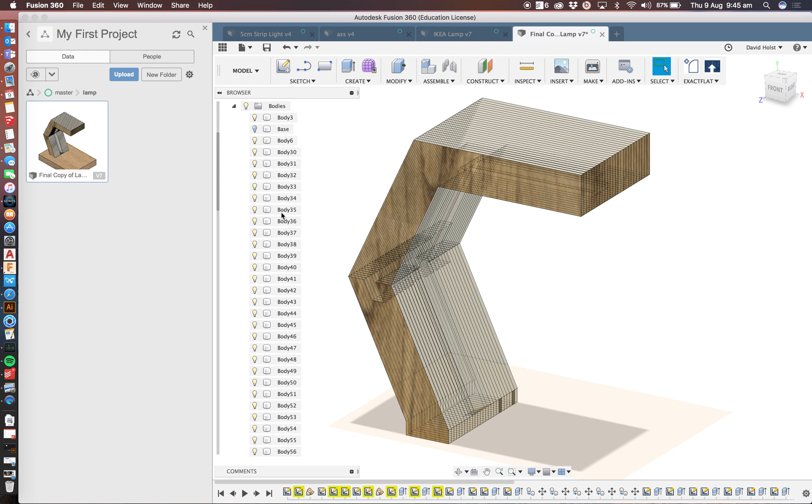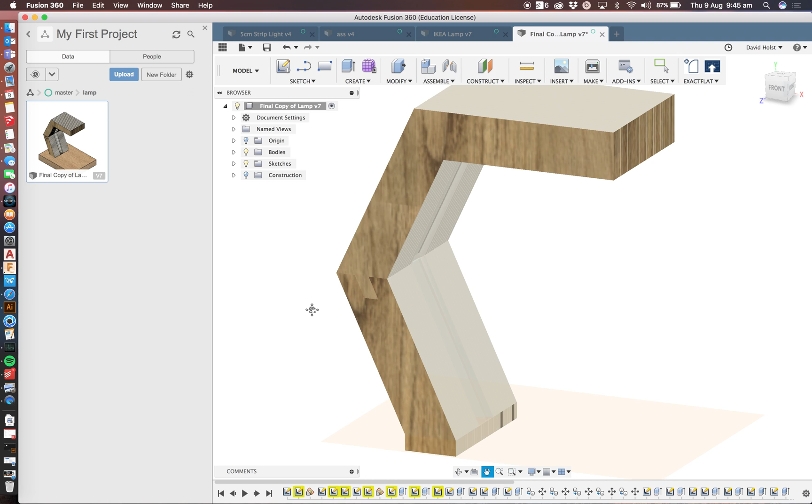You can see here that Mitch has got a little finger joint that alternates on each layer. So without taking into consideration this middle section where the LED sits, we're going to have 4 major parts to the arm of this lamp.

I'm going to show you how we can extract those and put them into Illustrator and get them ready to laser cut. The first thing we need to do is create a sketch up here and click on the face that has the information we need, which is this one here for me.

I'm going to hit P to project the geometry, and click on this shape. That brings all of the lines and sketch information from that previous face through, because that's the path I need to cut with my laser cutter. I'm going to hit OK.

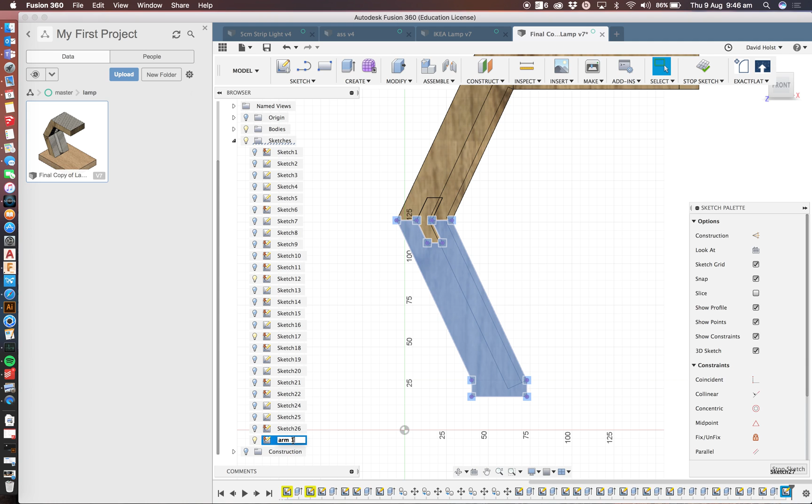I'm going to go over to Sketches, and I'm going to call this one Arm, because it's the arm of the lamp, 1 for layer 1, and it's the first part of that, so I'm going to go 1.1. So this is Arm, layer 1, part 1.

I'm then going to stop sketch, and create a sketch. I'm going to click on this top part, hit P to project my geometry, and hover over the top part. Click that, it brings the line work through. Hit OK.

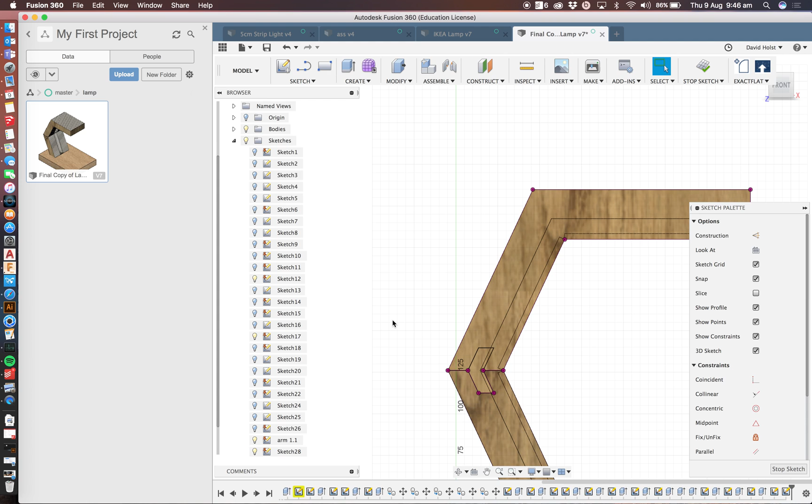Go down to my sketch name, and I'm going to call that one Arm 1.2, because that's the second part of layer 1. Now remember, you've got lots of multiple repeating parts in this, so you don't need to do this for each part.

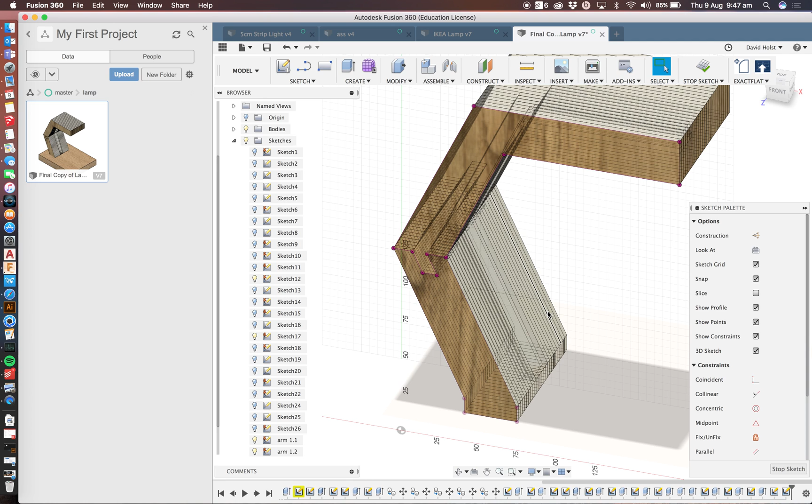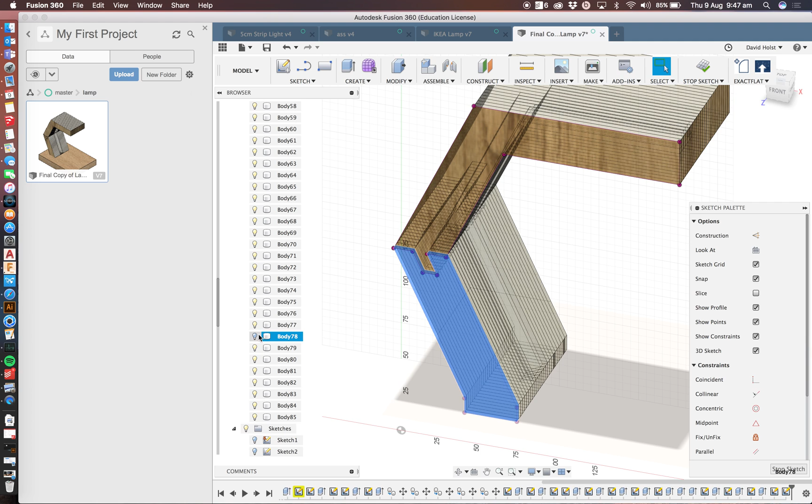This is why it pays to put your stuff into groups if you can. I could turn him off. I'll try and find that top one now, which is body 78. I'll turn him off.

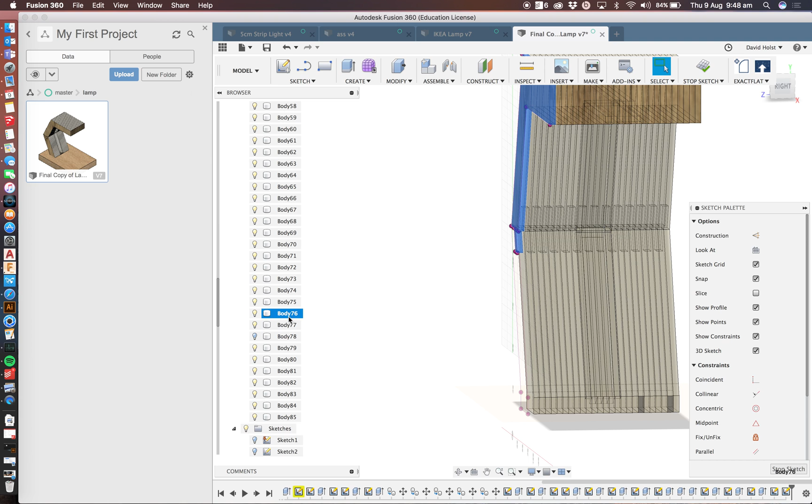And now I should be on the next layer. Hopefully. No, I turned the wrong one off. Need to grab that one. Try and find it, there it is, 76. I'll turn him off, okay.

These sketches are in the way of the ones I drew before, you can see by those pink lines. So if I want to get rid of those, I can scroll down back onto my sketches section and turn them off. Then I could do the same thing.

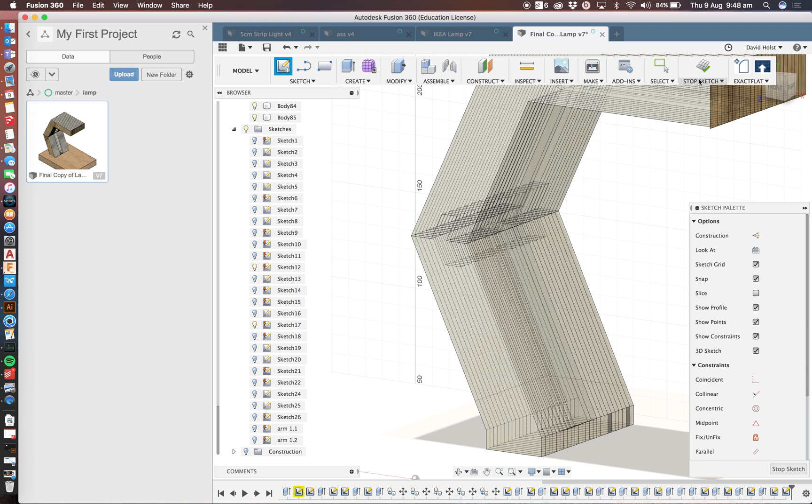So I'm going to go create sketch. I've turned that first layer off, so I'm on the second layer now. I'm going to stop sketch from that last one, turn Arm 1.2 off, create a sketch, jump onto here.

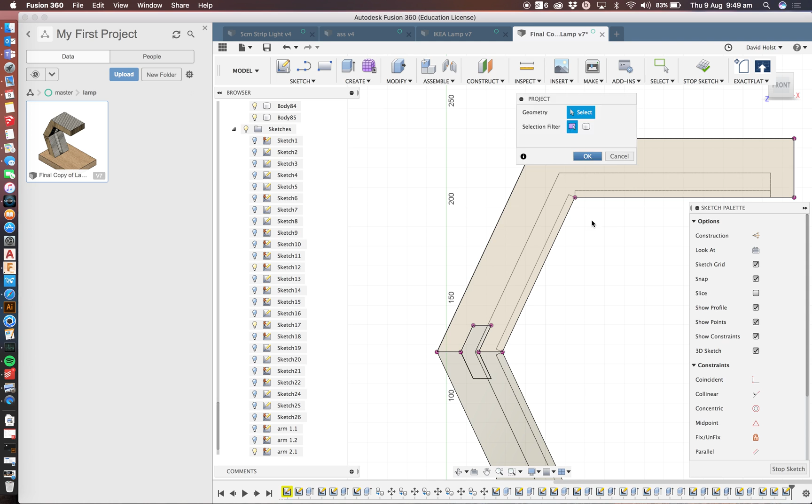I'm going to rename that to Arm 2.1. Project that through to make sure I've got it. OK, stop the sketch.

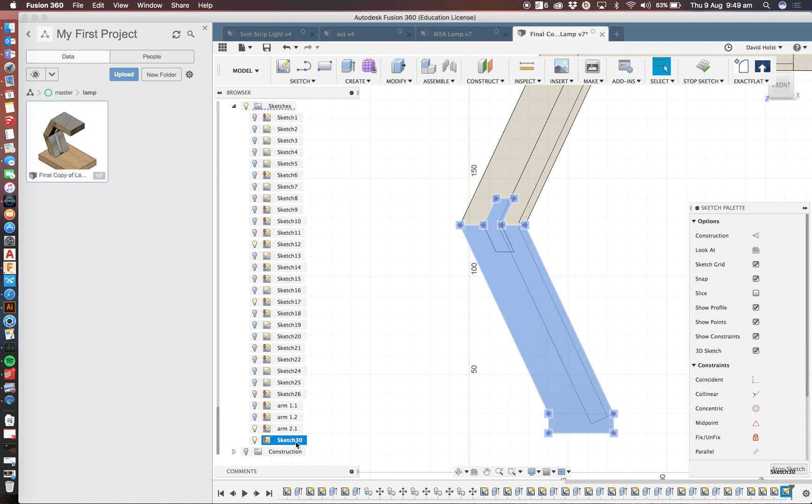New sketch, bottom one. Then I'm going to project it through, P for project, grab that one, OK, scroll down, and that is now Arm 2.2.

So I've got my 4 major parts that make up most of this arm here. Now what I need to do is export those to DXF. I'm going to go File, right click on ARM 1.1, save as DXF. On my desktop, I'm going to create a new folder called Mitch ARM Parts.

I'm going to call this ARM 1.1 and save it as a DXF format. Right click on ARM 1.2, save as DXF, call it ARM 1.2, save. Then ARM 2.1, right click, save as DXF. ARM 2.2, right click, save as DXF, and save.

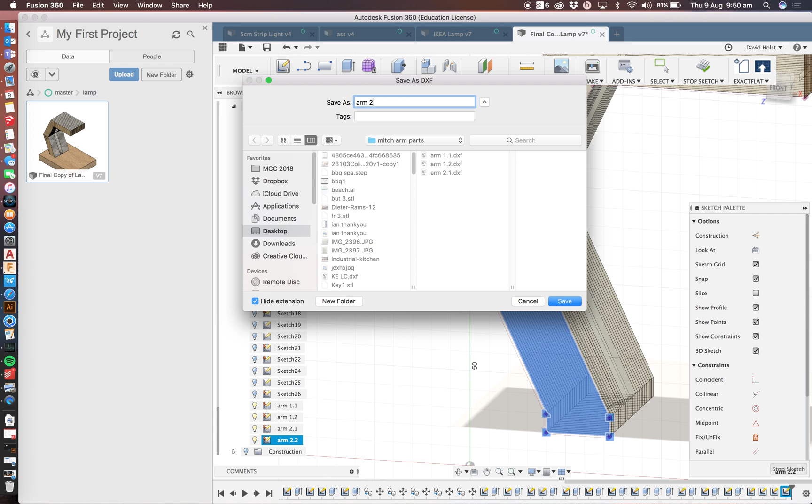So I've got all my 4 major parts now as DXF files. Now what I need to do is bring all those DXF files together so I can cut out multiple parts. To be honest, the first time you do this, you might just cut out maybe 1 copy of each part to check that you've got them correct, but I can show you how to do both of those.

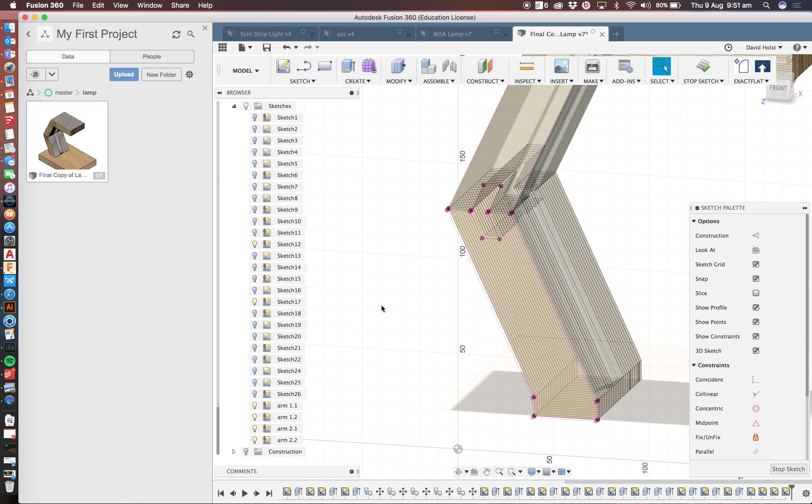So where we're going to actually put all those parts together is in a program called Adobe Illustrator. I'm going to open that up over here. So I've got Adobe Illustrator open. I'm going to click Create New, or you can go File New.

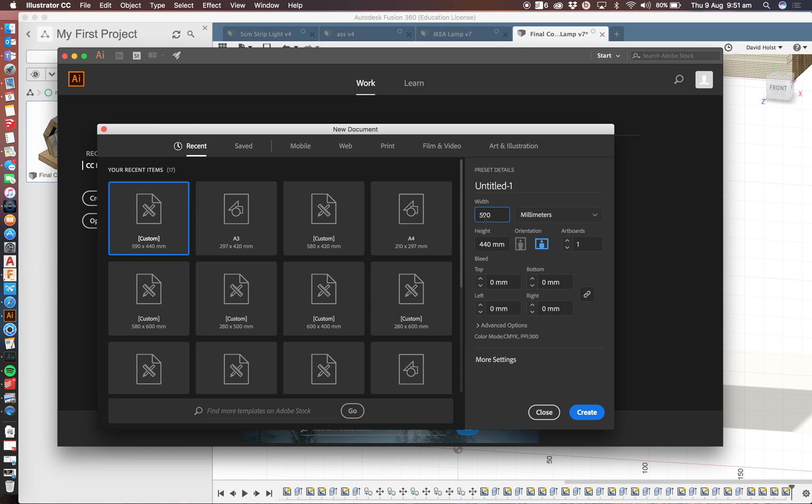Now this one's going to pop up, so we're going to go Custom. Make sure we're over here in millimeters. The width, I've already got it here because it was the last one I used - we want to make sure we're 590, and our height is 440. That's the size of pieces of plywood that have been cut up for us to use. And we're going to hit Create.

Okay, and that's our blank piece of plywood. Now we can get pretty close to the edges because I've allowed for the margins in this one. So we go File, and we're going to go Place.

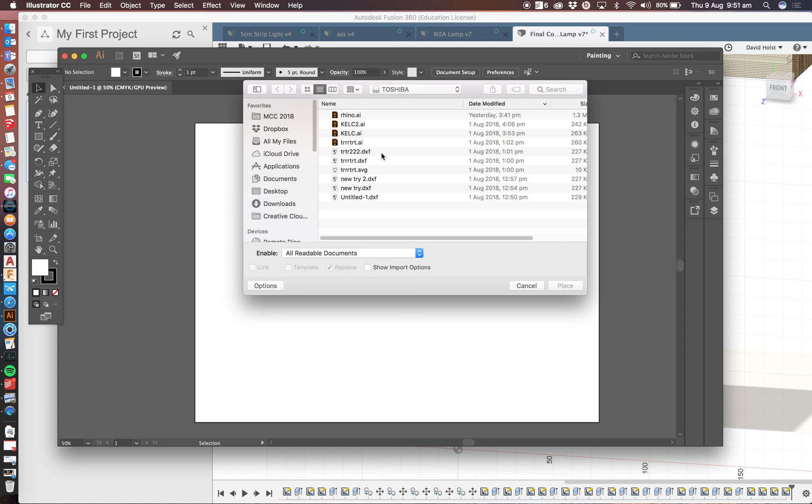And the first thing we're going to do is find our file. So I'm going to go onto my desktop, go into Mitch ARM Parts, and I'm going to go ARM 1.1, and I'm going to hit Place.

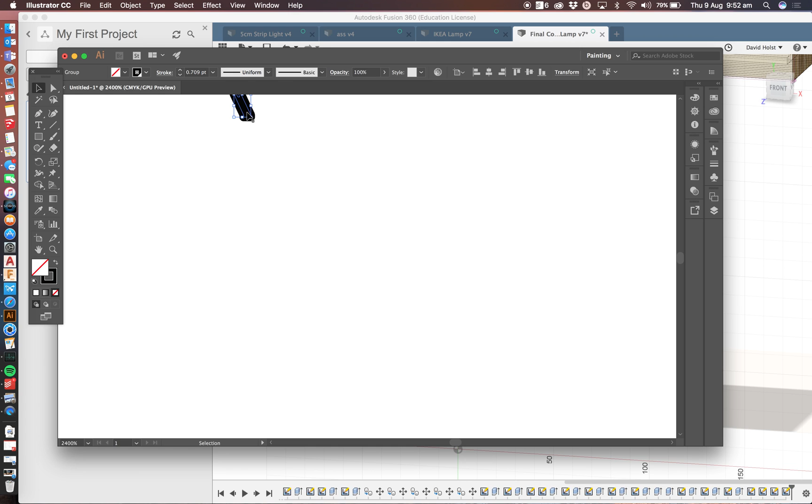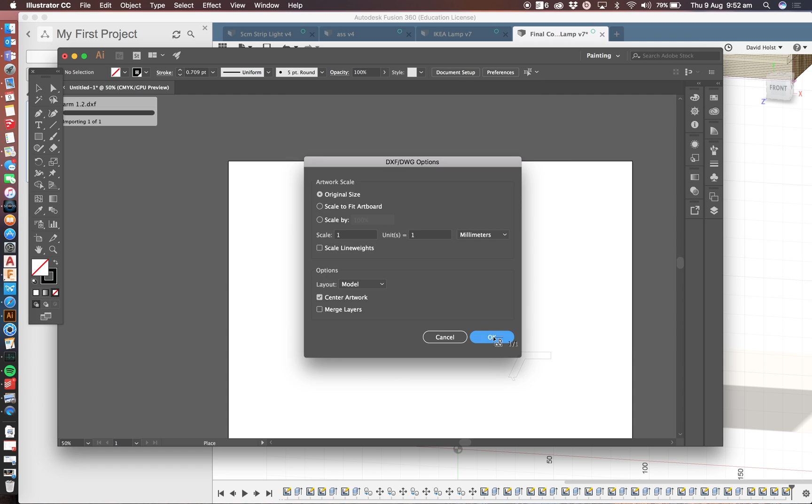That hasn't worked, so I'm just going to try again. File, Place, let's try ARM 1.2. Show import options, hit Place, original size, OK. There we go. File, Place, ARM 1.1, make sure Show import options is clicked. Hit Place, original size is what we're after. Hit OK, drop it in. There we go, so that's 1.1.

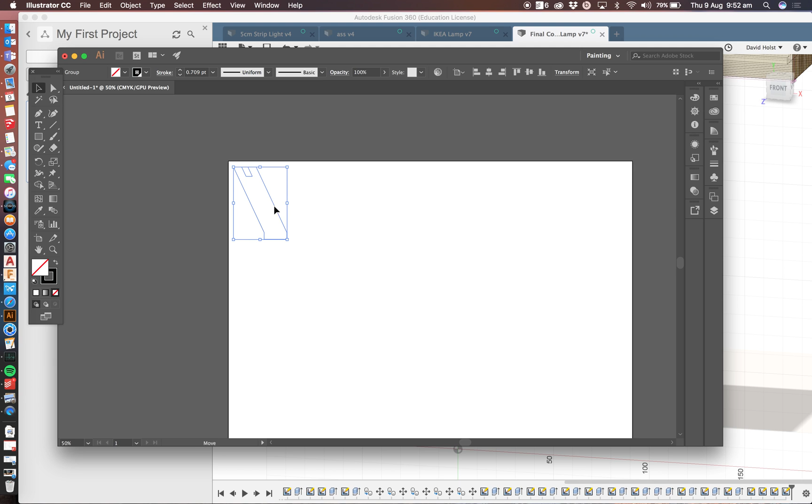File, Place, 1.2, Place, original size, OK. So that's the other part of it. I'll lay these out so you can kind of see - so that's those parts of it.

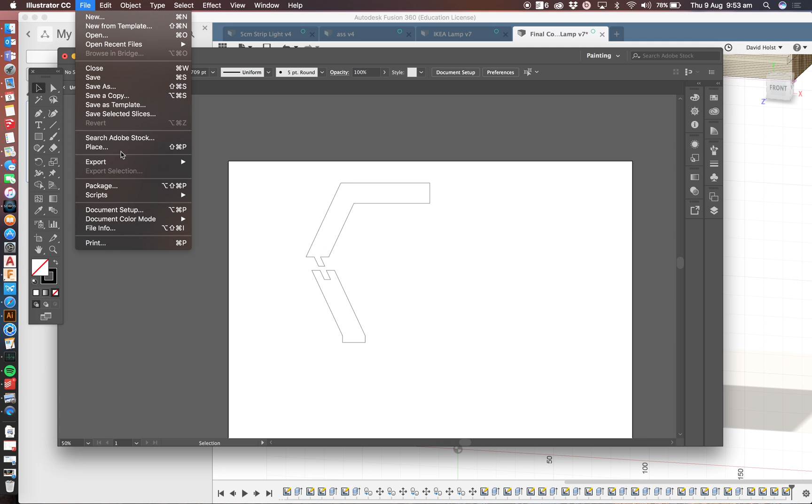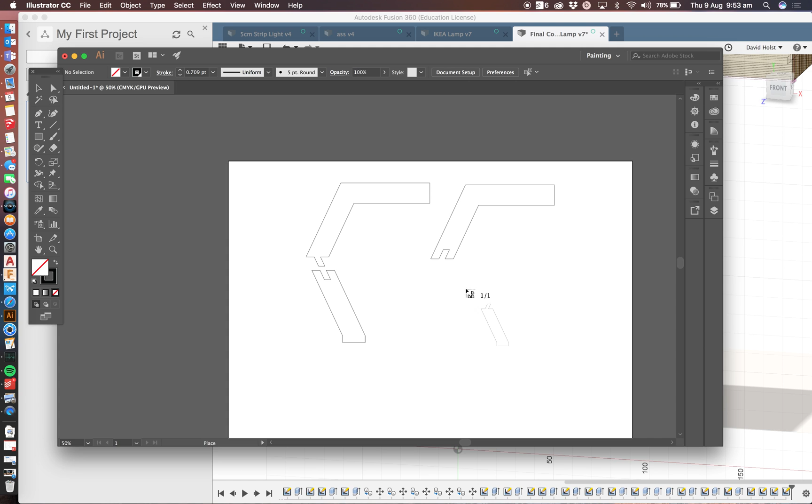File, Place, 2.1, original size, OK. And this is the other layer. File, Place, 2.1 - oh no, I need 2.2. File, Place, 2.2. Okay, like so. And there are our alternating layers.

Now, if I wanted to just do a test cut, the important thing is not to lay it out like this because it wastes a lot of plywood. Now, I'm just going to assume that Mitch has got this right.

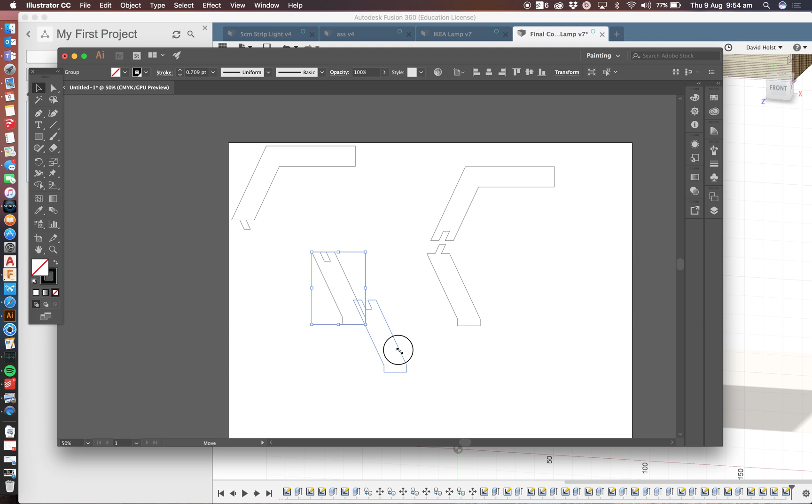And let's say that I want to do half the lamp, okay? So if I jump back into Fusion, I think I've got 10 parts - 1, 2, 3, 4, 5, 6, 7, 8, 9 - so we've got 9 on each side. So I'm going to do 5 of each to get us started.

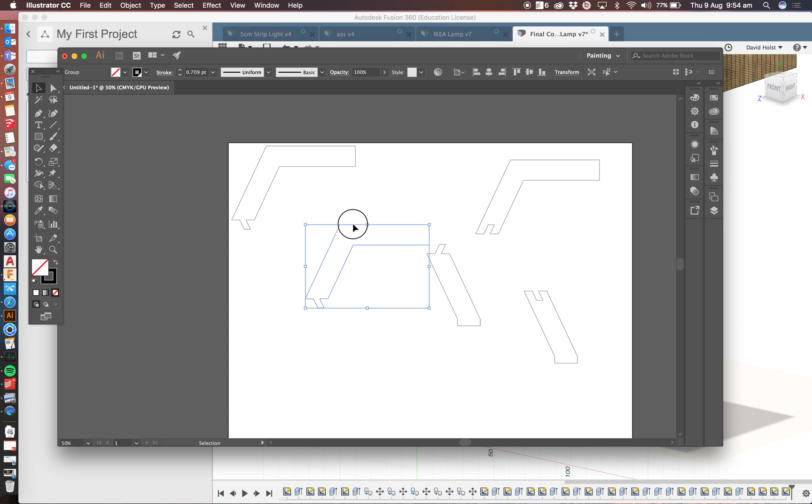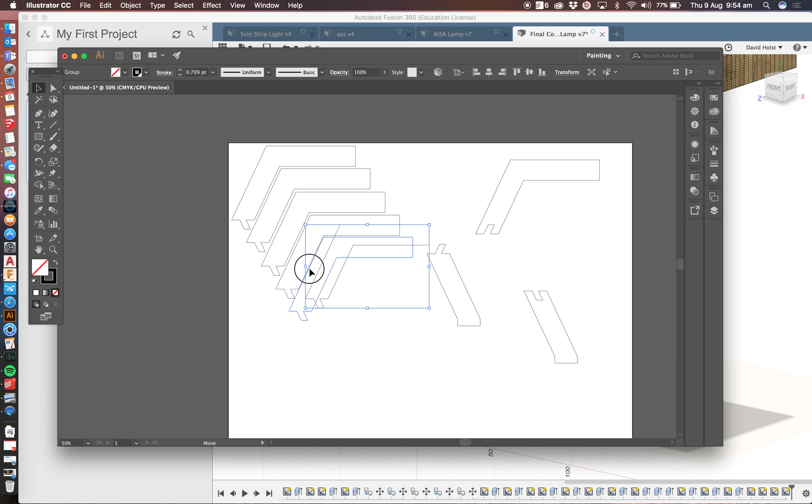Okay, so what we want to do now is nest it. This part here, I want 5 of those, so I'm going to go Command C, Command V, and try to get things as close as possible, leaving about a 4mm gap. Control C, Control V. Control C, Control V, and then let's go Control V again. So I'm nesting them together, trying to make the best use of the space.

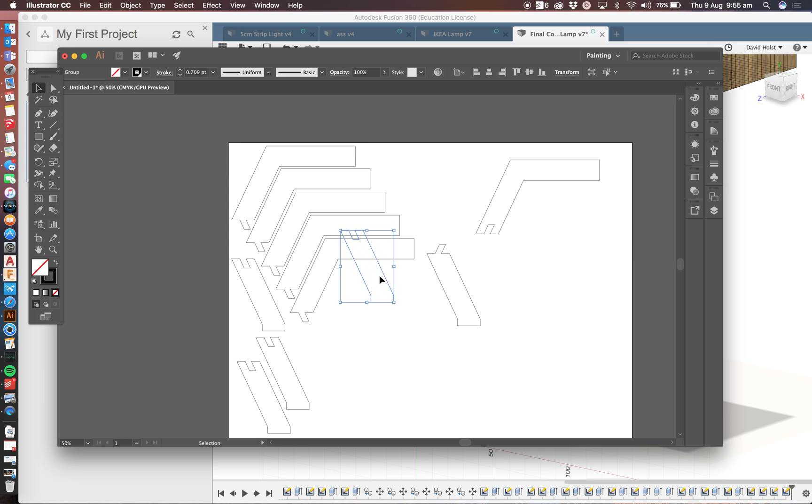Now I need 5 of these ones here, so I'm going to drop him over here. Control C, Control V - it's just like putting a big jigsaw puzzle together. Control C, Control V. Control C, Control V - I don't need to copy it each time, it's just bad habit, I think. Control V.

And then I've put those in there. Now I also need 5 of these, so I'm going to go Control C, Control V. Drop that one in there. Move this one to here. Control V. You can start rotating them if you like.

Go to the corner. I'm going to rotate that one to fit it in there. I'm just trying to use up as much space as possible to get the best value out of our plywood. Control V.

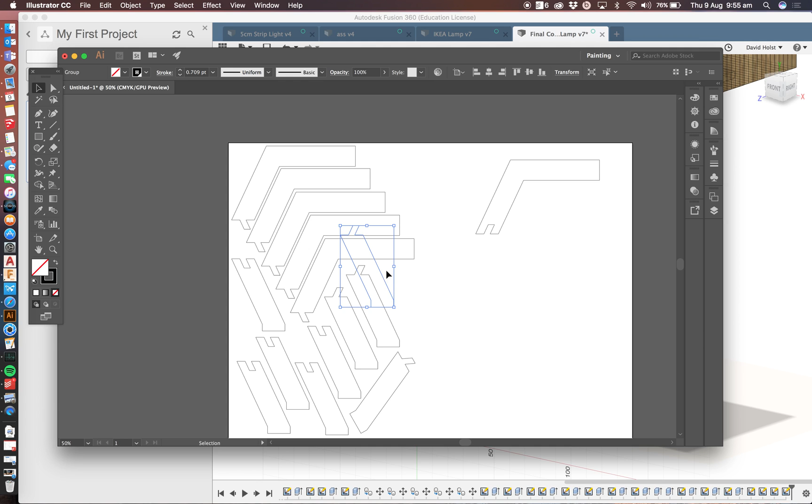Drop another one there, and then Control V. Put that one out over here somewhere. Now I need to get this one in. I'm going to rotate that around like that. Drop that one there. Control C, Control V. Just rotate things around and get a bit creative to make them fit.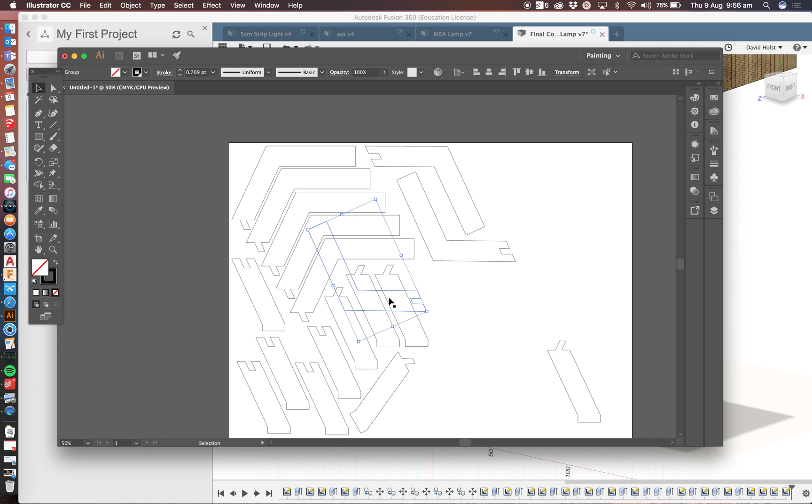That one in there. Control C, Control V. Grab that one there. 1, 2, 3, 4. Pull that to the side. Control C, Control V. Grab him, put him down here. Get that one flattish. If you hold shift, it'll snap to the 90 degree.

Make sure you got no lines overlapping so you don't cut any of your pieces. Grab him, rotate him around a bit, get him into there. And you can see that I'm starting to really efficiently use up my space.

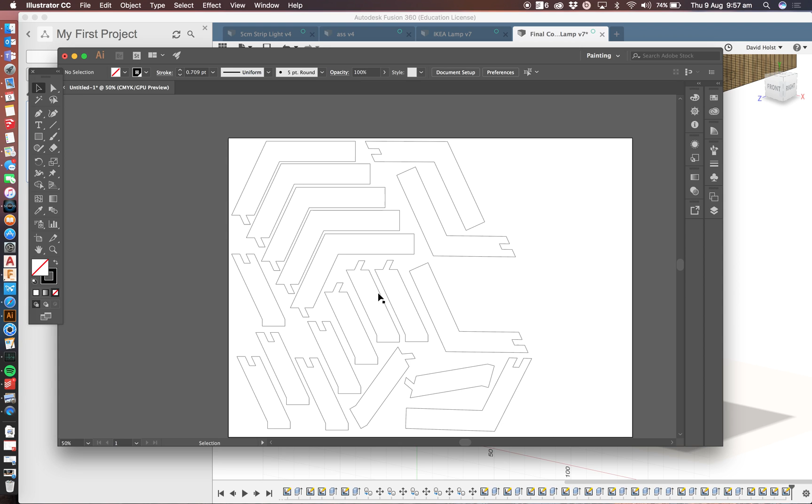Now, I might decide that, hey, I've got all this space and a sheet of plywood, and I'm going to be really efficient, so I'm going to cut out some more pieces because I know I need them on the other side of the lamp. So let's just say it's this bit here. It makes sense to fill a piece of plywood up because it's just more efficient for everyone else in the class.

And I'm going to use these on the other side anyway, so that's cool. So I might have 5 of those. Might grab this guy down here. Control C, Control V.

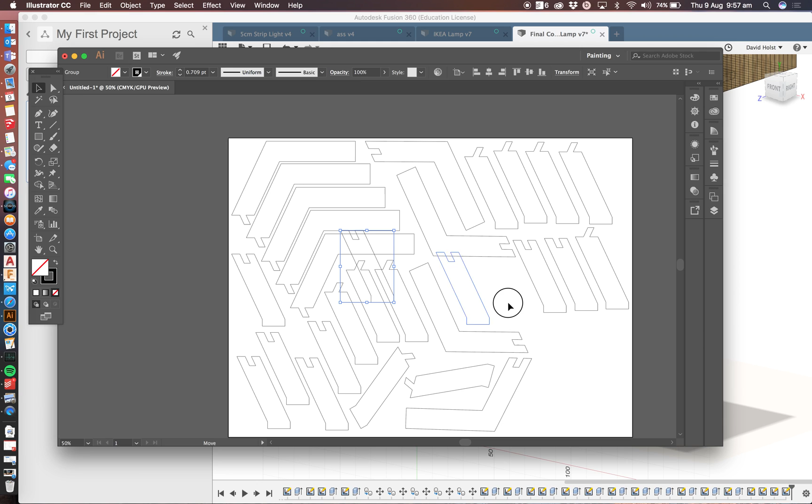Squeeze him in there. Whoop, undo. Make sure we've got the right bit. Squeeze him into there. Might be able to get another one of these in.

Try not to just fill it up, make sure you're actually cutting parts that you need. Because it's all about, when we're doing this CAM manufacturing, it's all about getting as efficient as possible. And might grab another one of these.

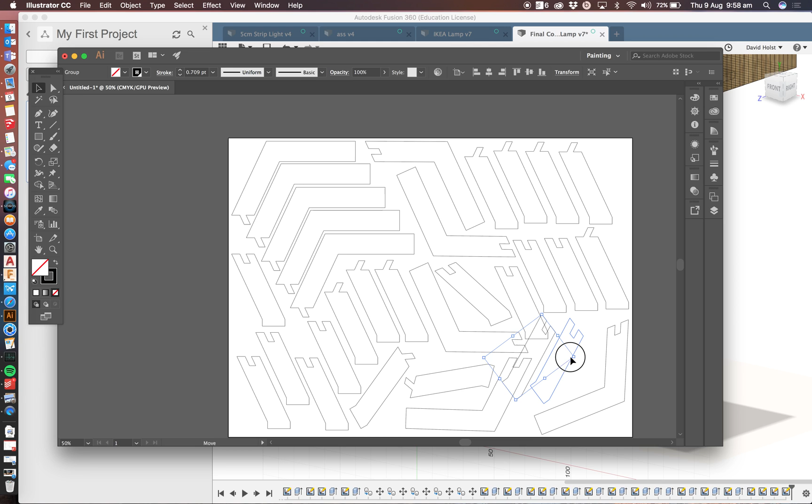Drop it in here. So as you can see, I've tried to fill up as much of the plywood as possible and cut out as many pieces as possible. And it would make sense to either jump into Excel, make a spreadsheet, work out how many parts you actually need and how many you've cut so that you can remain efficient.

But that's looking like a pretty good board to send to the laser cutter. Try and save about 5mm within the edges so that you don't lose any parts, but that's now ready to send to the laser cutter.

So for us to send to the laser cutter, the first thing I'd do is go File, Save As, and save it in Mitch Arm Parts, just as an Adobe Illustrator file. So I'm going to call this Arm Parts Sheet 1, so we can open it back up later and modify it or recut it or do whatever we've got to do. Version Illustrator CC, that's all good. That's a nice editable version for later on.

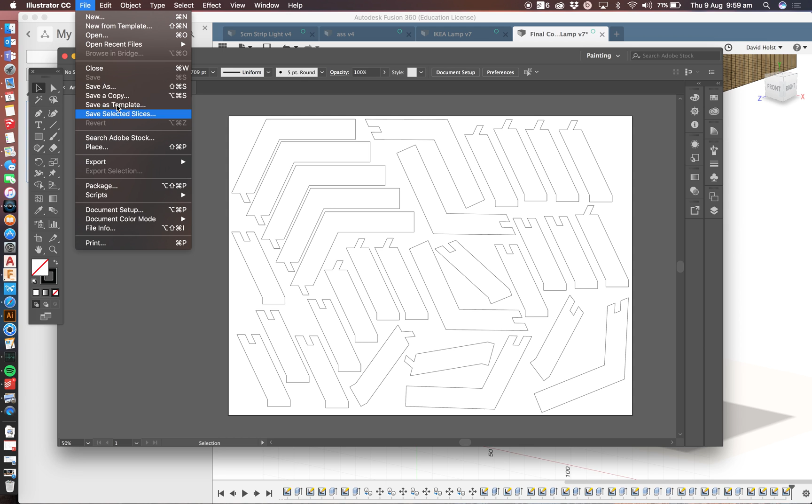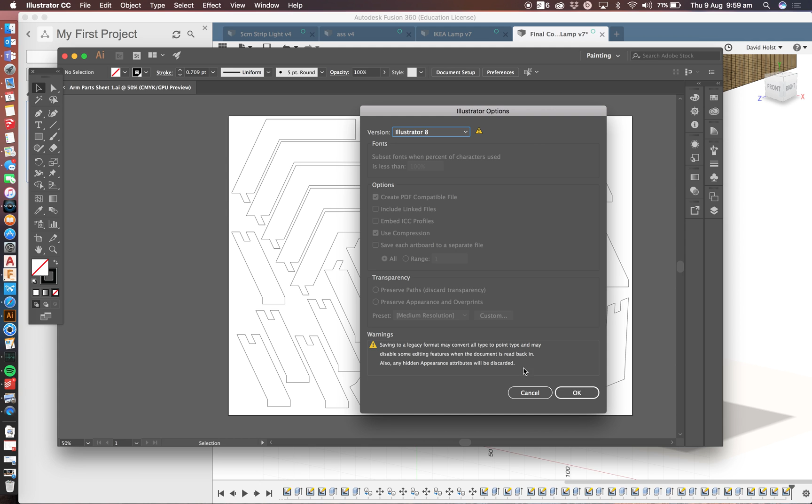And then if we go File, Save As, we're going to jump onto a USB drive, my Toshiba here. Make sure you put your name on it because it's going to get very confusing. So I'm going to call this Mitch sheet 1. We're going to save it as Adobe Illustrator, hit save, and the only thing we want to change here is our version. I want to bring that all the way back to Illustrator 8, and hit OK. And then hit OK, and that's now going to save that one onto the USB, and that'll be ready to open up on the laser computer.